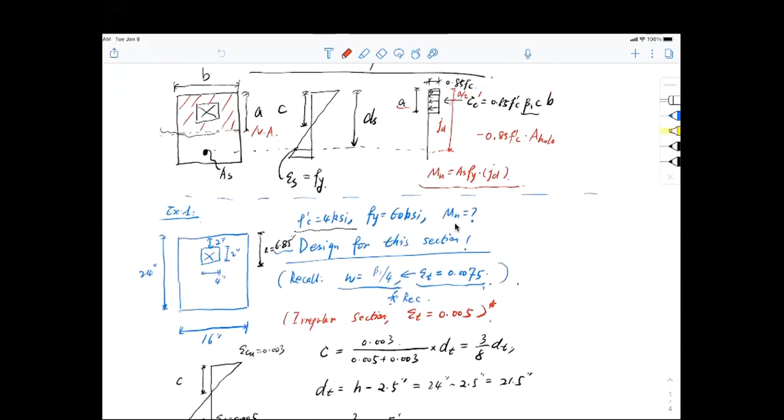So last time we talked about a section like this, right? And it was actually a design problem. I threw you a curveball at the beginning. We said that we have a rectangular section, but we have an opening in the middle. And we went in, calculated, and found out that my compressive zone A happened to be magically covering the opening. From that point, since it's covering the opening, everything's simple. We do a big block minus small block, right?

And how to do that is you assume that these blocks follow the Whitney stress block. So this thing here has a uniformly distributed compressive stress of 0.85 f'c and has a depth of a. And this opening here is assumed to be negative 0.85 f'c with whatever width the opening is. So you use that and subtract the opening, and got your total moment. And then you still need to check the strain in the steel.

And I had this question about the T-beam from a student. In the T-beam, we have the wings on the side and the web in the middle. But to check phi, the strength reduction factor, is a only related to the web, or is a also dependent on the wing? Let me rephrase. To check phi, what do we need to determine the strength reduction factor? Think about it.

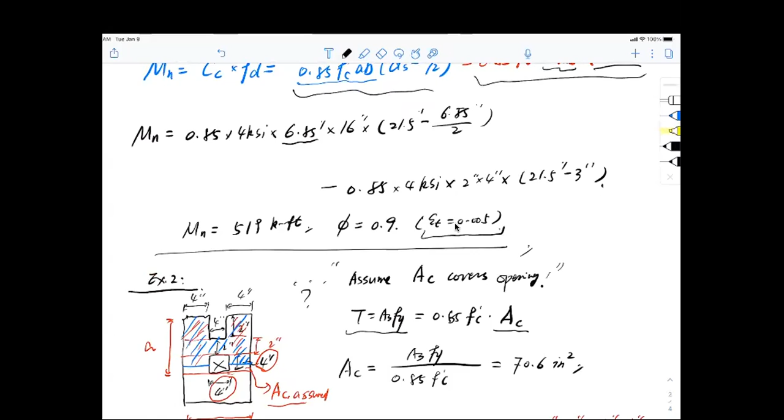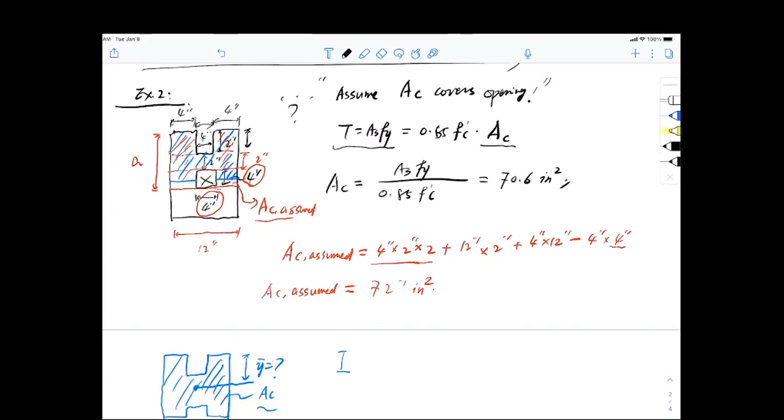So with that, we come to this problem here, and I have an irregular section just like so. Let me open my notes here. It follows a weird shape: I have some small pieces here, a gap here, and an opening in the middle. So for that weird shape, what I need to know is where the center of my compressive zone is. And to find the center of the compressive zone, first I need to calculate the effective compressive area Ac to find out whether my compressive zone covers this opening or not.

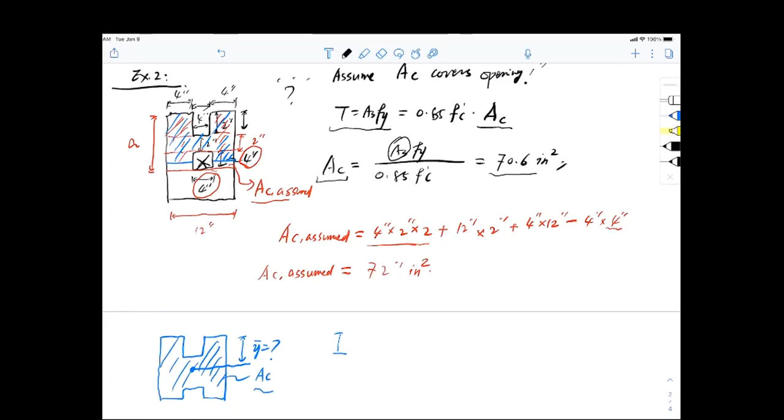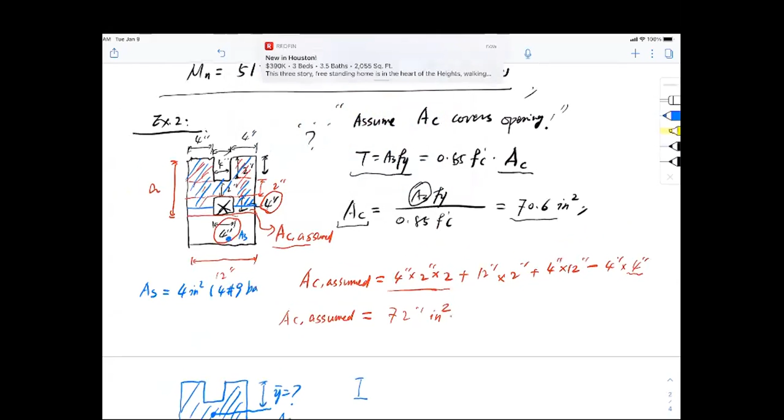Last time, I made a mistake. I forgot to tell you what exactly this reinforcement area is. I just made something here and said 70.6 at the end of it. This problem is actually an analysis problem, not a design. So As is actually given. Let me put it down here so you know. As, reinforcement somewhere at the bottom here, is given, and that is 4 inches squared, 4 number 9 bars. Concrete f'c is 4 ksi, and steel is 60 ksi, of course.

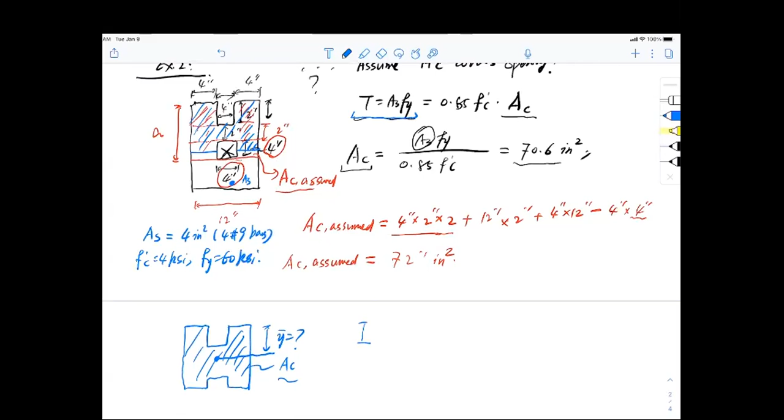Then we assume everything yielded first, got a total tensile force, let it equal the compression force, and found Ac, which is 70.6 inches squared. Knowing that's the total compressive zone, we check whether it covers the opening or not. Last time we drew a line where it barely covers the opening, and that is 72 inches squared, which is too big compared to the 70.6 inches squared required Ac, so it does not cover the opening. If it does not cover the opening, my neutral axis is somewhere here.

And mind you, folks, this is my tiny opening there, right? The neutral axis just draws across that opening. And the problem is, I don't even know where this neutral axis is here. Let me just call it Y bar. You see a lot of Y bar, right? I just love Y bars. So how to determine this fellow here? How to determine this fellow here?

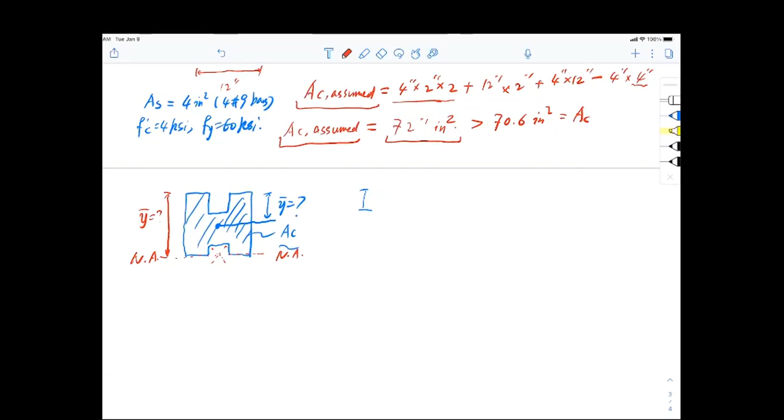So the great war artist Sun Tzu from China said, if you have a lot of enemies, you do what? Divide and conquer, right? How do we divide? In this problem, if I divide this piece into these two tiny little wings, I call it area 1. Let me just clean up the shaded piece to see better. Now I can also cut the other area, this belly area right here, and I call it area number 2. Whatever is left in the bottom corner here I call area number 3.

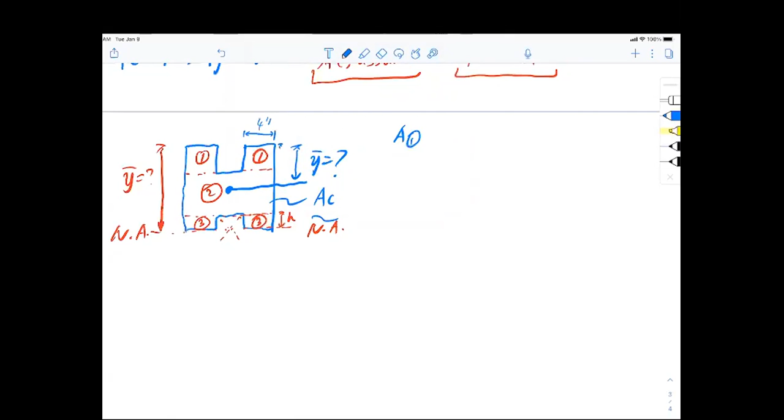So the name of the game is actually to find the height of area number 3 here. So how do I do that? Here's how we're gonna do it. A1, the total area of this tiny block, is 4 inches, and this fellow here is 2 inches. So 4 multiplied by 2 multiplied by 2 pieces gives a total of 32 inches squared. Then A2 is this belly fellow here, with 12 inches in the middle, and the height is 2 inches. My drawing is not proportional, but 12 multiplied by 2 gives me 24 inches squared.

Then I'm left with A3, but I know that the total compressive zone has to equal AC anyway. So AC minus A1 minus A2 gives me A3, and AC is 70.6 inches squared. Yes? Oh yeah, sorry. Did I do that again? You're right, I made a mistake here actually. Thank you. The dimension is wrong. It's 4 inches on the side.

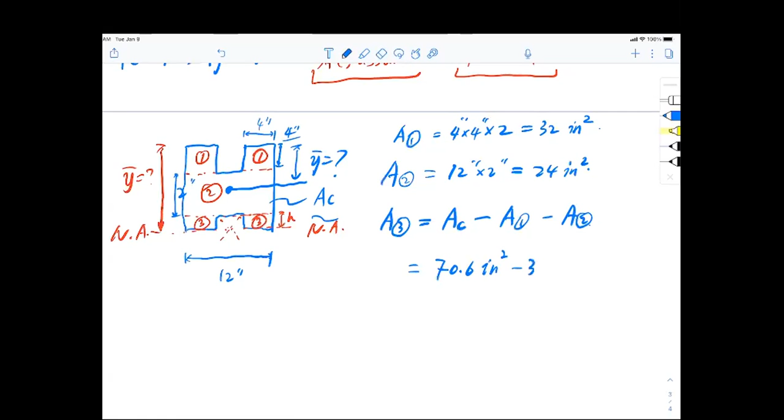So 70.6 inches squared minus 32 minus 24. What did I get, folks? Can I get a check? I have some number, but I'm not sure of it. Help me out here, folks. What did you get? 14.6 inches squared, right? Great. So I know my tiny area 3 has 14.6 inches squared.

So with that, let me draw out this tiny area here. I have these two tiny wings, I call it area 3. Now for this fellow here, I need to know the distance. The distance here is given, which is the opening of 4 inches. So here's 4. So 12 minus 4. This is 4 again. So all I need to find out is this tiny height. We call it H3.

So H3 is area 3 divided by the width of it, which is B, and that is 12 inches minus 4 inches. So I have 14.6 inches squared divided by 8 inches, and I got my H3 equal to 1.825 inches. So you see this number, 1.825 inches. It barely covers the opening, but it is not in the opening. So I got my geometry, I got my H3.

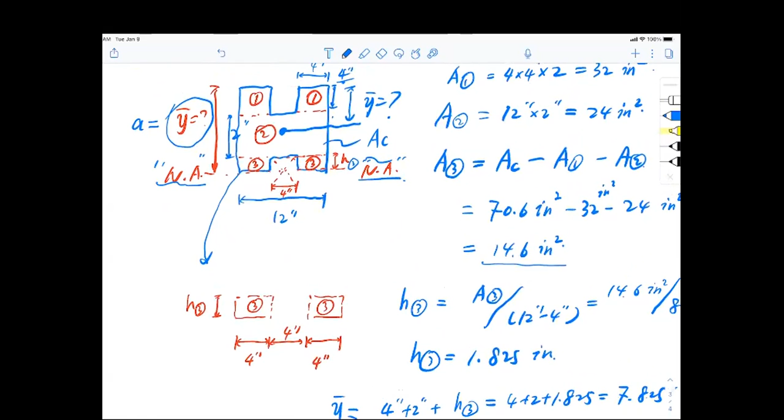So it is not the neutral axis. Why is that? Because this y bar here, ladies and gentlemen, is the effective compressive zone size A. Okay, that is not C, which is the actual. This is effective. So in this case, A is y bar, this fellow here, 7.825 inch.

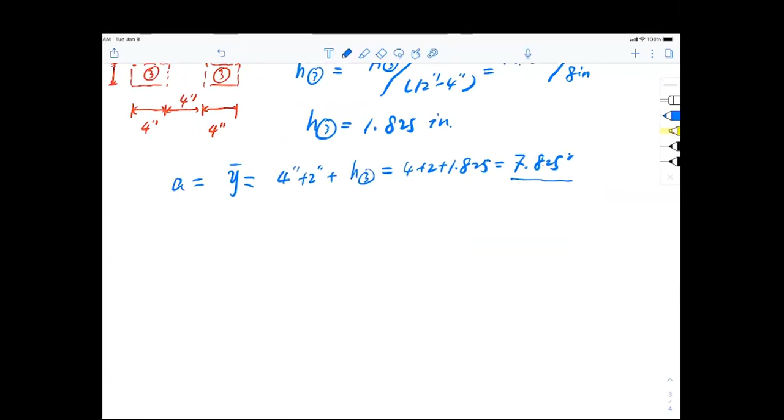All right. Now, what does it mean? It means that for this weird castle-like section, my effective compressive zone is somewhere here, A equal to 7.825 inch. And that is my total compressive area, AC, equal to 70.6 inch squared. And that's what it means. Very simple.

So now, some of you may say, Bob, this is a little bit too specific for this problem, right? What if I have a problem like this? And this happened in the exam, right? You're feeling pretty happy? Not much, right? What if I have an exam where I had to do a section like this? Ooh, spicy, eh?

Have you seen Squid Game on Netflix? What if I have a horrible umbrella shape, right? Oh boy, a nightmare, and you know what? Cut an opening. You're gonna figure that one out, hey? What if, like the Pharaoh in Egypt, there's a nice pyramid, and there's a water duct going like this. Symbolic stuff, pretty powerful stuff, right?

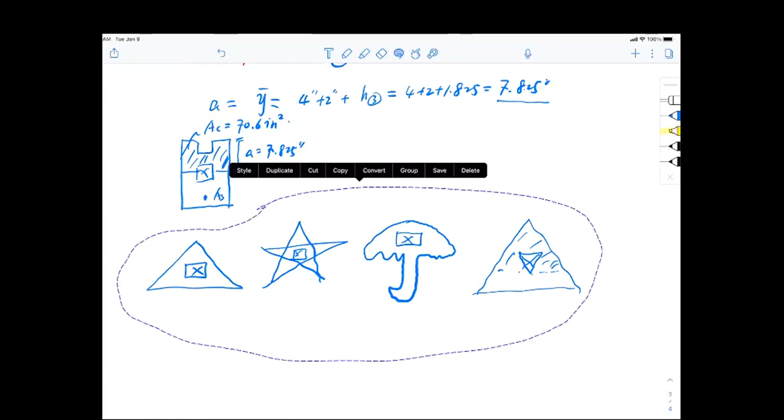And now what are you gonna do? Now you cannot do it the dumb way Bob did. Bob said, draw a line, make sure the compressive zone covers the opening. It doesn't work sometimes. So in a complicated situation, this approach does not work. So how can we make it work? This is how. The official solution, a universal, powerful tool, is that you do this.

Y bar, or A, is essentially equal to sigma AI YI divided by sigma AI. Remember? Just like how we did the bars: find the centroid of it. So this is essentially what it is. The center of the whole shape here, let me use a different letter, X, is this fellow here. And at the same time, sigma AI, meaning all these areas added up, has to equal AC. So this is more of a general approach.

So what we have done up here is just trying to find AC and find A, which is to find this line. And the next step is to find the center of this shaded area. So how do I find it? Let me magnify this shape so you see better. Now I look at this shaded area and I say, look, I have an H type of section here, with 1 here, 2 here, 3 here.

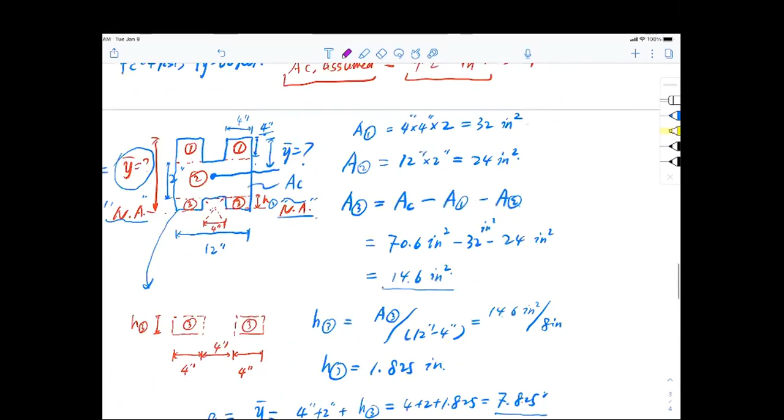To find my X, I need to pick a reference. In this setup, my X is right here, starting from this distance. So let's do X with A1, and to be consistent and not confused, use xi, so x1. Now, what is the distance between the centroid of 1 and the reference line? Given that this is 4 inch, X1 equals 2 inches, right in the center of it.

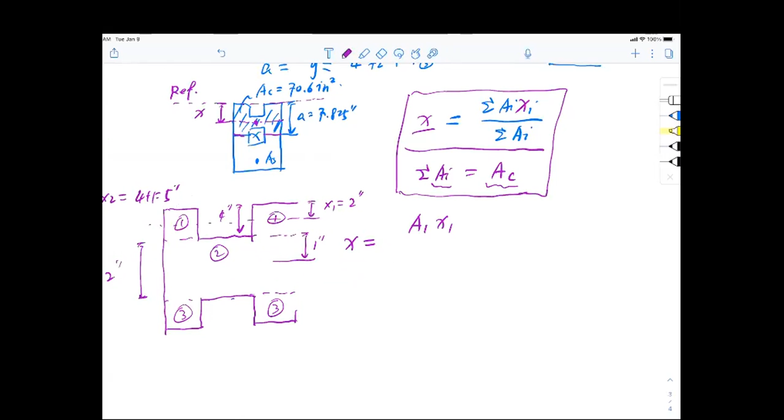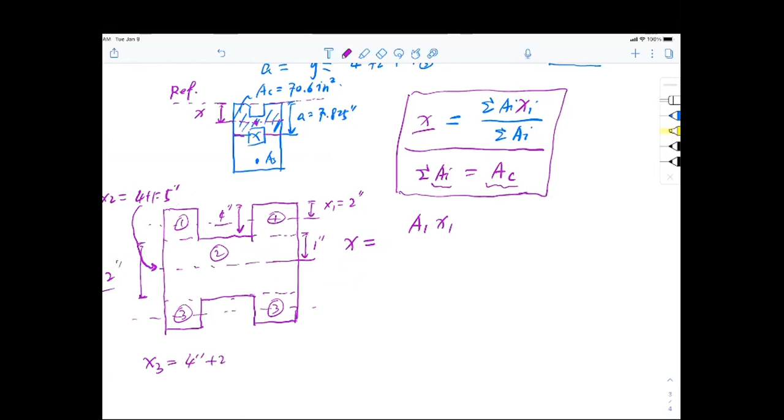And 2, naturally, this is simple. Again, my drawing is horrible. 2 inch, so this is 1 inch distance away. So X2 is 4 plus 1 equal to 5 inch. Let me move this away so it's easier. So this is X2, and that's the center there. And now X3 equals 4 inch plus 2 inch plus H3 divided by 2, and H3 is this fellow here.

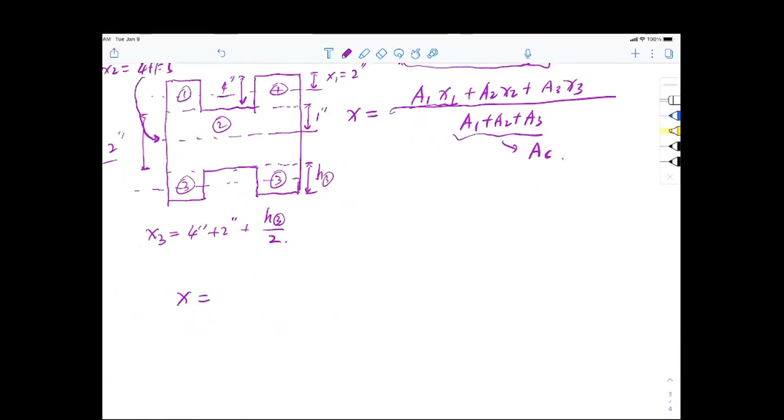Okay, so now we have X equal to A1 X1 plus A2 X2 plus A3 X3 divided by the whole area, A1 plus A2 plus A3, and you know this value is AC. Okay, so let's plug all the numbers in. So now I know X equal to A1. What is A1? 32 inches squared is A1. We calculated it before, right? Here, 32 inches squared. And 32 inches squared multiplied by X1. X1 is 2 inches. Plus A2, which is 24 inches squared, multiplied by X2, that is 4 plus 2 divided by 2, because I have the center of it, so this is 5

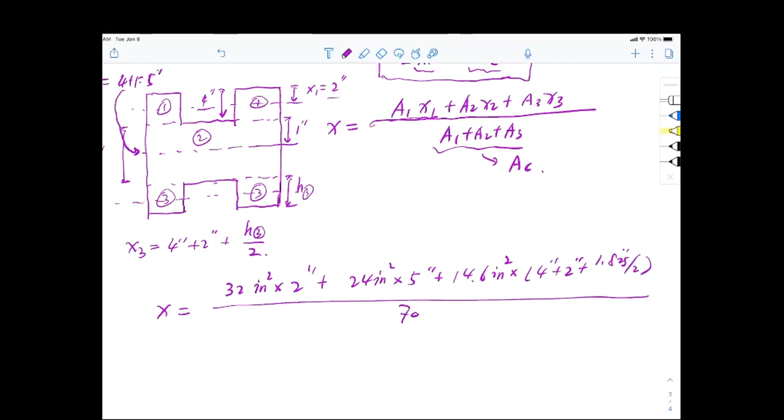inches, plus 14.6 inches squared, multiplied by 4 inches plus 2 plus 1.825 divided by 2, and now divide the whole thing by 70.6 inches squared, and now I got my X value equal to what? 4.94 inches. All right. So 4.94, where am I? So somewhere here is my centroid. Somewhere here is the centroid of the compressive zone. So at this point, I'm very happy. Why is that? Because I have found my compressive zone and found the centroid of the compressive zone.

Why do I care about the centroid of compressive zone? Because in the next step, you need to find what? Mn, the moment. And the moment equal to what? As fy, the tension force, multiplied by distance, right? And the distance would be ds minus what? Half a? Option number 1, half a. Option number 2, I don't know. Option number 3, hurry up, write it. Which one? That is the mission of the game, to find the centroid of the whole compressive zone, X. All right? Okay, so now with that, I can continue.

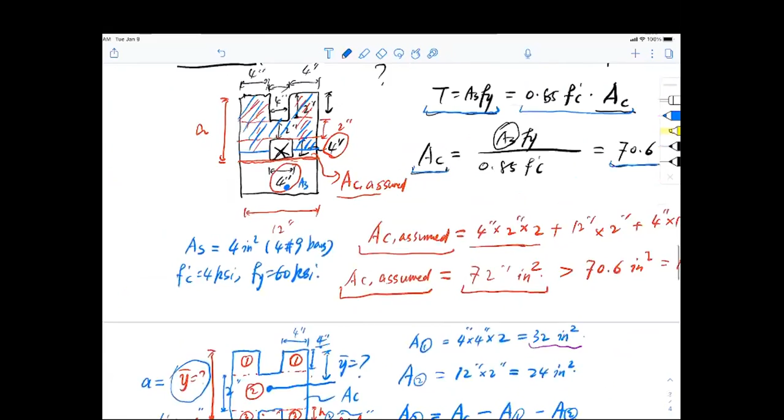Now, As is 4 number 9 bars. So 4 inches squared multiplied by 60 ksi. And now ds, what is ds? Did I tell you or not? I probably didn't tell you, did I? Yeah, I'm lousy. Sorry about that.

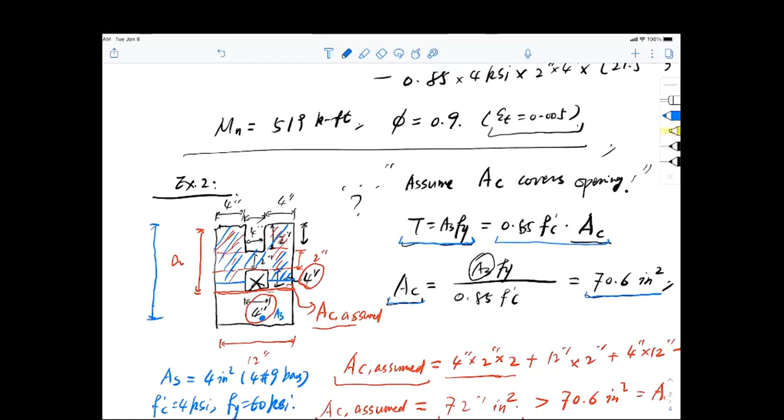The distance between the top fiber to the reinforcement is given for this problem, 18 inches, okay? To make life easier for you, 18 inches is given. It's not a design. So here, 18 minus 4.94 inches, and I got my total moment. And again, please check me, okay? How much did you get? Anybody? Can I get a number on this?

Well, that's in kip-inches, right? Can I get a conversion to kip-foot? So divide everything by 12. 261.2 kip-foot. That's what I got. Anybody get different? I could be wrong. I'm very bad at numbers, actually. Did anybody get a different number? No? Okay, good. So that is my moment capacity for this irregular shape.

Are we done? Can we leave it like this and go home? Probably not. What's missing, folks? Phi, right? What is phi? Strength reduction factor. Now, what is the strength reduction factor dependent on? It's a function of what? Epsilon t. Exactly. So how do I get epsilon t? I use dt minus what? C or a here? C. Divided by c and multiplied by epsilon cu, which is what?

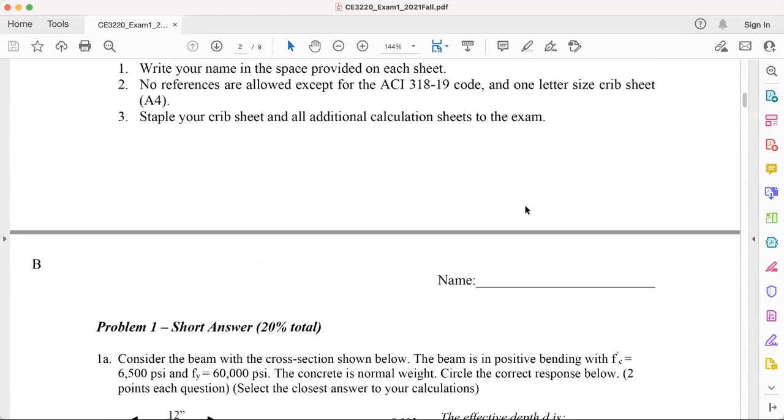Where is it? Teaching. What did I share? Let me see how I'm gonna share this. For exam number 1. Okay, this is that. All right, open it up. Okay, is it coming out? Okay, this is coming out. Good deal. Okay, so let me share the screen with you guys. Can you guys see it? This is your midterm, okay? Oh, not seeing. Okay, sorry. Let me just drag it over here. Again, I have some problems sometimes. Still not too big. Come on. Oh boy, I hate it. Okay, this is good. All right, so I think you guys see it.

The first problem, consider the beam with cross-section shown below. The beam is in positive bending this way, and that's the diagram. And the effective depth D is what? What do you choose? Which one? I got 16.15, 2.5, 14.75, and 17. Which one? 16.15, right? Okay. So how do I get that?

How do I get that? You get a Y bar, right? Some of you just didn't do the Y bar and assumed it's for number 9, for number 8, and went from there, you did a mistake. Okay. So that's the first one, 16.15.

Second one, truth be told, at the last minute, I threw away the other 3 versions, only kept this version. So all of you are testing on one version, okay? Apologize. I just wanted to save my grading work a little bit. And it works. I didn't see anybody cheating, so I'm pretty happy about the outcome. But next year I'm gonna change. I had A, B, C, D, threw out A, C, and D, only left the B version. The strength reduction factor phi, all right?